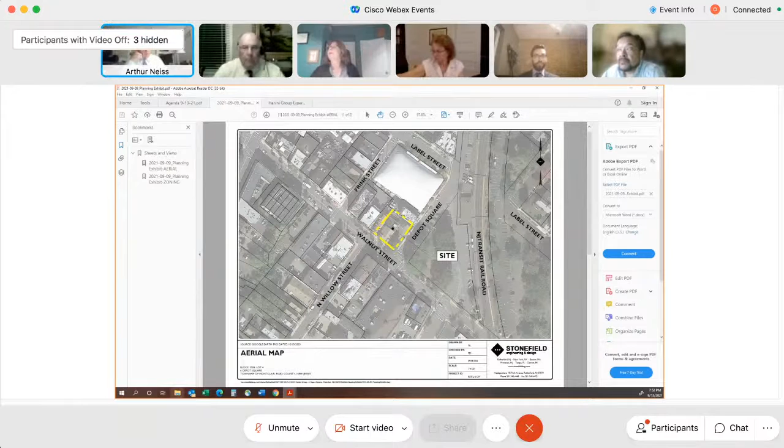Okay, before you begin, how many slides are there in the Hanini Group experience, if you know? It says 12 here.

Okay, Alan, if you want to proceed. Sure. Good evening, Mr. Chairman, members of the board. My name is Alan Trembulak. I am proud to be appearing this evening to present this application on behalf of my client, 6 Depot Square LLC.

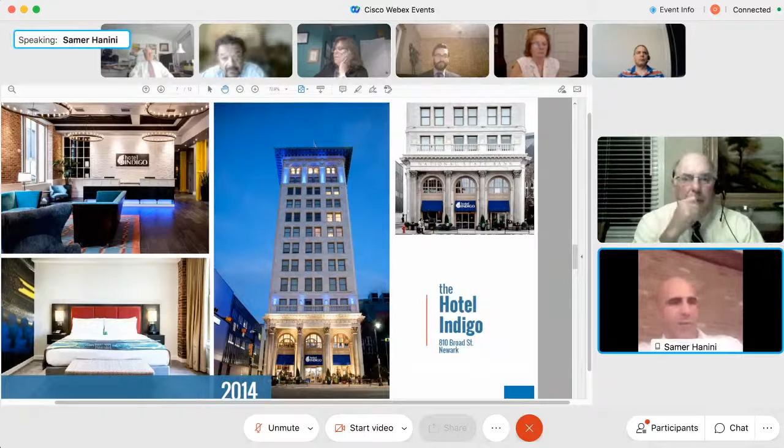This is the Hotel Indigo, another really exciting project. This was the old National Bank building, sat vacant for about 20 years. We converted it into the hotel, and again this won an award for engineering and restoration. On this particular project we did an extensive training program with a vocational school—we took 30 kids from vocational school and put them through training at Essex County College for hospitality. This was really interesting because we were able to bring the social aspect in with the restoration.

That covers our portfolio. I welcome you guys to visit our website and our LinkedIn page—we constantly update our sites with new information and things like that.

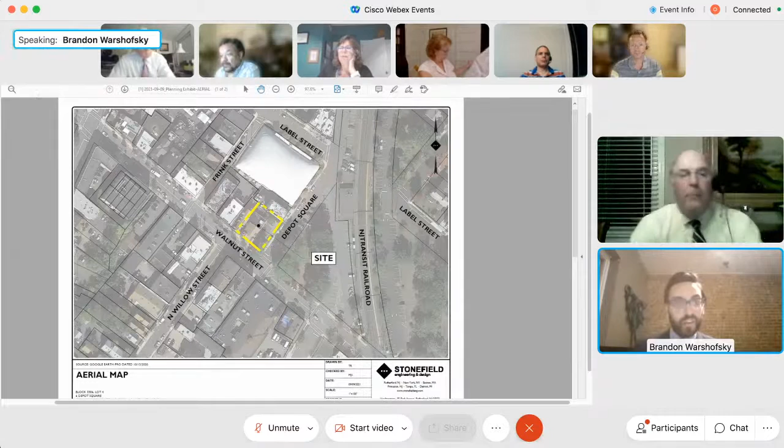When were you first licensed as an architect in New Jersey? I first received my license in New Jersey in 2017. You've been practicing architecture ever since? Yes, I have. And your license is in good standing today? Yes, it is. And as you indicated, you've testified before other planning boards and boards of adjustment in New Jersey? That is correct. And in all those prior applications, have you been accepted as an expert in the field of architecture? Yes, I have been.

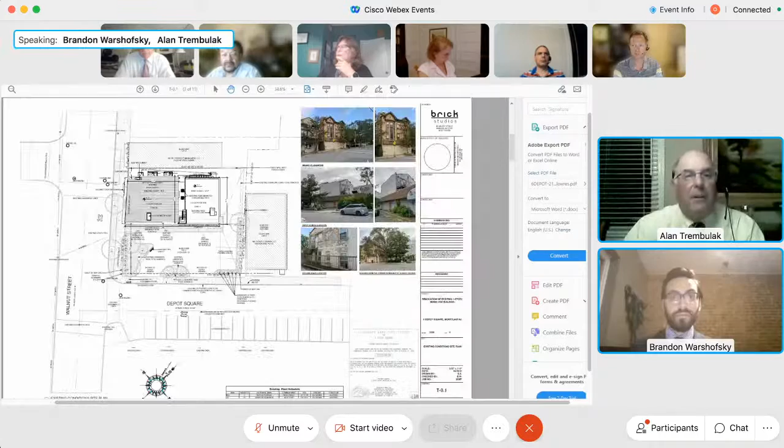Mr. Chair, I'd offer Mr. Warshofsky as an expert architect. We'll accept him. Thank you.

Mr. Brandon, you prepared the site plan drawings submitted with this application, is that correct? Yes, I did. And did you also attend the meeting of the Development Review Committee when the site plan drawings were reviewed by that committee? Yes, I did. And you also attended the meeting or meetings of the Historic Preservation Commission when the plans were reviewed? Yes, I did. And as a result of the various reviews preceding tonight's meeting, did you subsequently prepare and submit revised plans to address the comments and concerns, particularly of the Development Review Committee? Yes, and those revised drawings are what are in front of us now. And those have a revision date of August 9th, 2021, is that correct? That is correct.

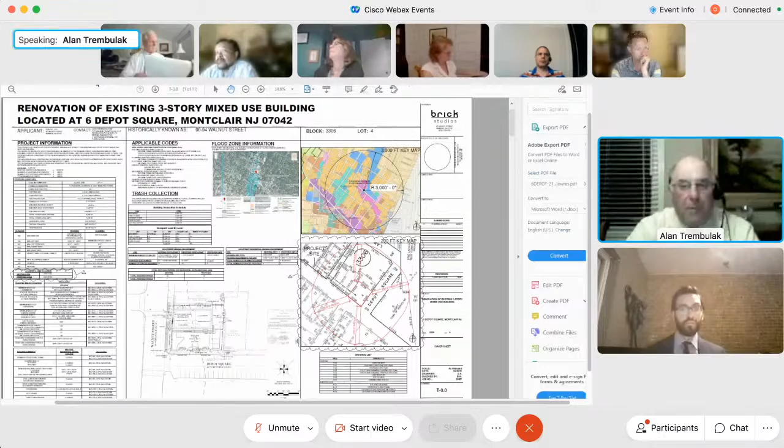So as you indicated, the plans are on the screen, and I'd like you to review the plans with the board, starting with the discussion of the existing conditions on the property, or starting wherever you feel like. Absolutely, I think that's a great spot, starting with the existing conditions.

So we have an existing building, as already discussed. It is an existing 3-story building. It fronts on Walnut Street and on Depot Square, with a small parking roundabout in the front of the building on the Depot Square side. The ground floor existing is a former Trumpets Jazz Club space that occupied the entire first floor, and the basement level was part of their service storage area. On the upper floors, the second and third floor, each existing contained 1 apartment unit.

We are proposing creating 2 apartment units on each of the existing second and third floors, and we are not proposing any volumetric additions to the building. So the building is existing, and the work to the building will be limited to interior fit out and exterior modifications to the facade as required based on the condition, and based on some of the considerations of the Historic Review Committee, and on other good practices such as good waterproofing and floodproofing practices.

We are proposing to restore the Walnut Street storefront to a similar state as it historically was observed, which we present. I don't know, Janice, if you want to flip around, I think on the 7th sheet we have that. There you go. Historic elevation, as well as some existing photos on the sheet that we're looking at here.

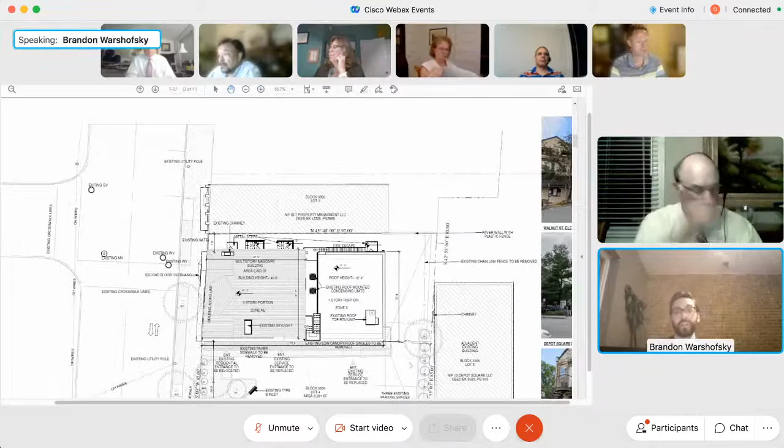And looking here, we can see that first floor where the Walnut Street facade has been completely covered over as part of the renovation to create the Jazz Club, which occurred, I believe, in early 1990.

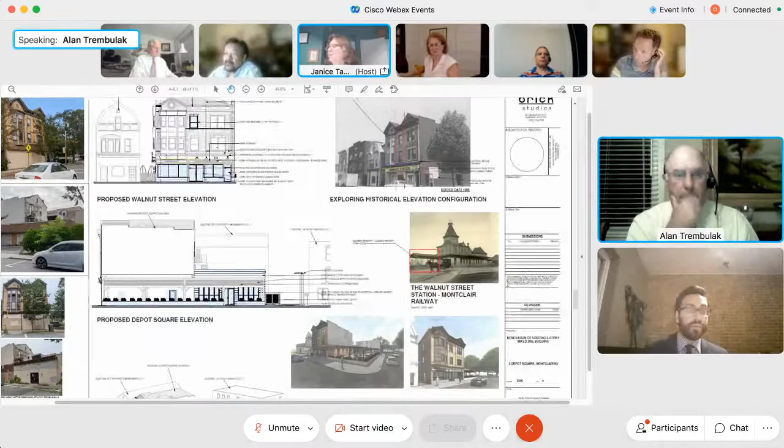And then on, sorry to jump around, the seventh sheet we show a historic elevation. I think that's sheet A-0.1. Sheet 7 though, right? I think you just passed it. I did, I went too far. Sheet 8, maybe, I'm sorry. Is this it? Yes.

And so we took our inspiration from the historic documentation as part of the historic survey that was done in the 80s in Montclair, as well as some design inspiration from some of the older details, such as the details observed at the Walnut Street station across the way, trying to draw some inspiration from the ironwork details that we see there at the train station.

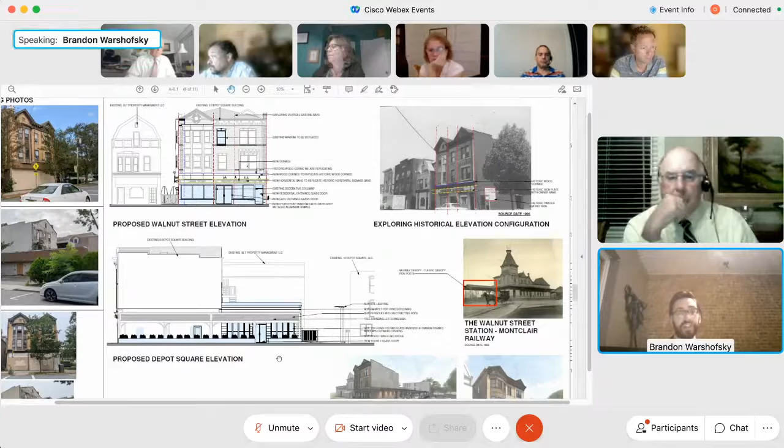So as far as the site plan goes, the proposal is introducing a new retractable pergola area in the area, which is currently a turnaround driveway. That will be a four-season outdoor dining space exclusively for the use of the restaurant or the rear first floor tenant. The canopy is retractable and would allow for natural light and air, for activation during the daytime as well as at nighttime, and it can extend for weather protection in rain and other weather.

The entrance to the restaurant space and the outdoor dining space is from the Depot Square side of the frontage. And the entrance for the cafe space is exclusively through the front facade, the building portion on Walnut Street.

We're proposing new building lighting to illuminate the area of the pergola, as well as some low pole-mounted lights in the service area to illuminate the trash enclosure, the driveway area, at proper levels that are required, as well as a very specific cutoff pattern to eliminate any kind of glare on the adjoining properties.

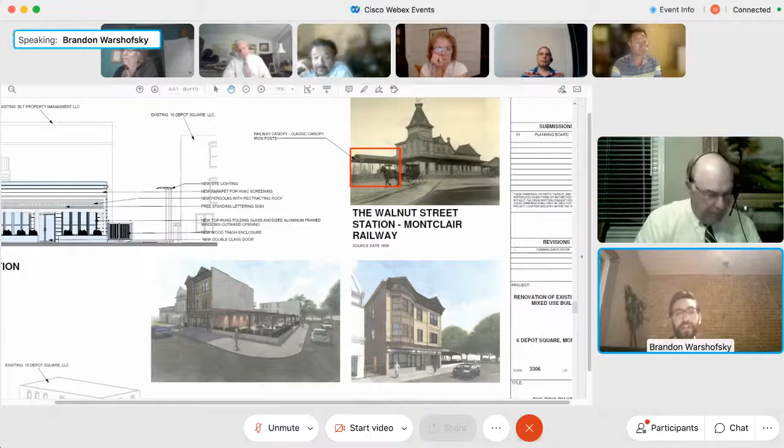We're proposing a small knee wall with plantings that are going around the perimeter to separate the seating area from the sidewalk, but all of the occupancy exists within the boundaries of the property. There would be no sidewalk cafe occupancy proposed.

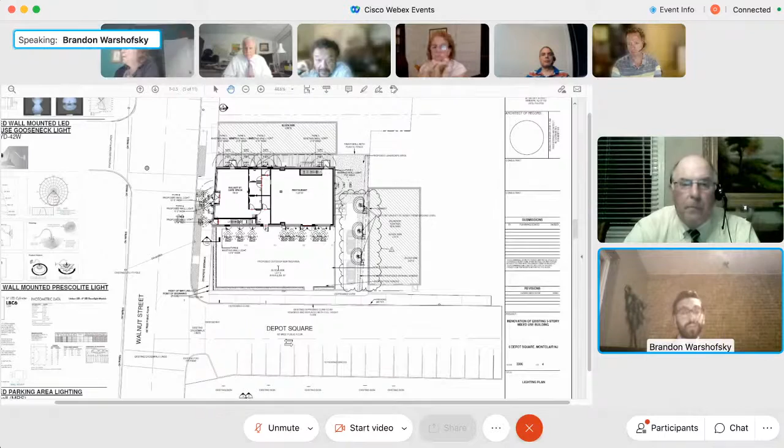Going back to the site plan, we reevaluated based on the board engineer's comments the amount of impervious surface we were introducing by taking away the existing green area. We're now attempting to replace that with new landscaped area around the parking and around the rear of the building. Anything shown in green there is proposed landscape area, which keeps our total impervious surface at almost the same number as existing today.

Mr. Warshofsky, I have a question about this page. The new raised access flooring, I think, is what you mean there. Yes, I'll chalk that up to a drafting error. The previous design had this on a pedestal system to create a seating area, so that raised access flooring is now replaced with landscape area.

So when you say landscape area, it's going to be a grass area? Grass area. Okay. And then we're introducing screening elements, those plants around the corner, here and over here. And then those in the front next to the cars are existing mature plants that we're going to keep as that screening element from the neighbor.

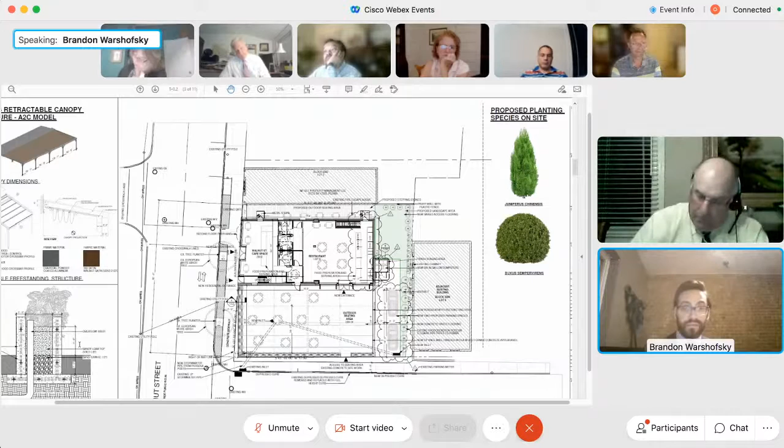And that's going to be planted with boxwood? We'll put little boxwoods in there. Okay.

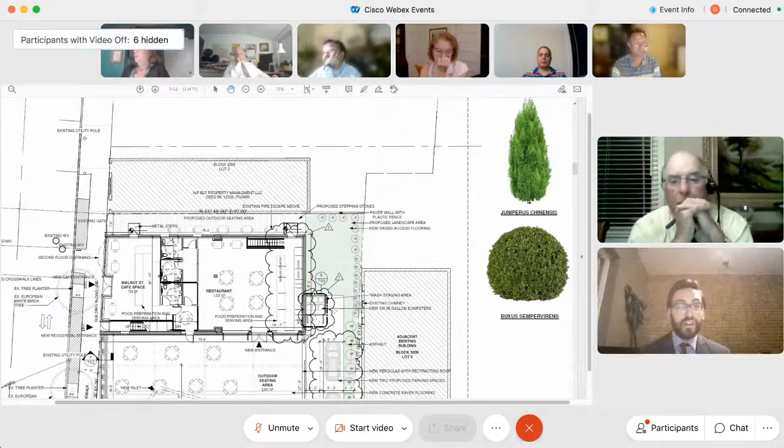While we're looking at the site plan, I was going to ask you to discuss the trash enclosure and what's proposed and where. Absolutely. We also revised the trash enclosure, both the location and construction, to be more respectful of the neighbor's building. We pulled it away from the property line and closer up against the subject building, and we've revised the details.

So one of the waivers we're seeking — we would be happy to comply with the requirements for the wood fence enclosure with a small roof over the trash enclosure. So are you basically saying the trash enclosure will comply with the requirements of the Montclair ordinance, so that no waiver would be requested or required? That would be our intent.

Okay, thank you. I do have a question about that trash enclosure — it still strikes me that it's right next to the neighbor's building and there are lots of windows on that side. Why don't you push it back away from the windows of your neighbor's apartment building? It's going to be smelly garbage from commercial restaurant waste. We're trying to minimize the impact of impervious surface by minimizing the driveway as well as creating new screening elements. Those smaller circles up against the property line are the new junipers we'd be planting as a screening element, as well as complying with the ordinance for construction of the enclosure. It should provide satisfactory screening and separation from the neighbor's building.

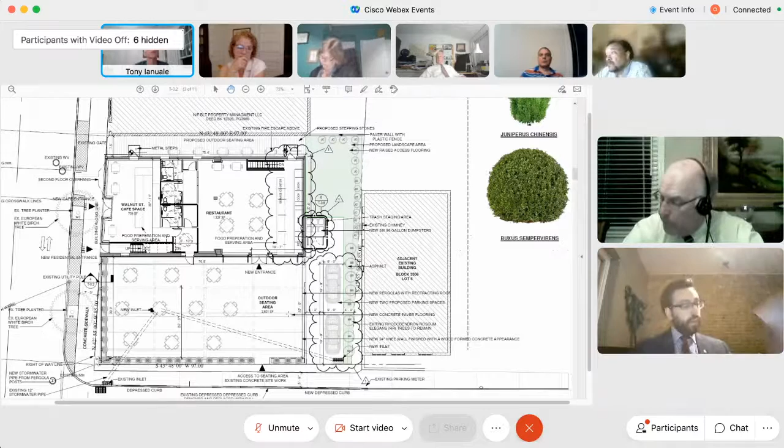Okay, here's an architecture question. How does that thing roll up? Can you explain how this retractable roof works and what it would look like when it's up or down? Absolutely, I believe there would be a detail of it on this same sheet. If you can go to the top left portion of this sheet - so it is a rigid frame. What sheet is that in our packet? Can you tell me the drawing number? E0.2, the third sheet. Thanks.

So it's a rigid frame that remains fixed, and the canopy fabric itself is on parallel bars that run along these rigid frame tracks. So the whole thing will retract back to the high point, and the fabric drapes between those bars as it retracts.

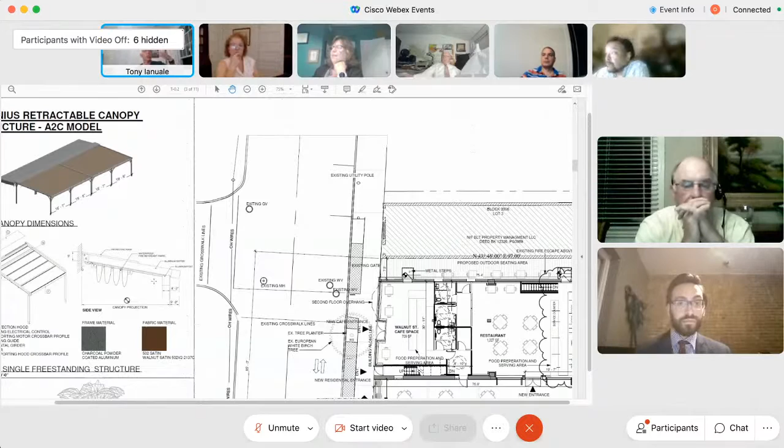Awesome, thanks a lot. And since there's no civil, there's a new inlet - are you going to retain any of that water on site, or is that just going to be piped out off site? There is an existing connection, so we are planning on attaching to that existing storm connection for our management, and actually reusing some of the catch basins that are there on site.

Okay, and then do you have a net zero add of impervious? I'm not sure if you might have said that, I apologize if you did. We have a net loss of about 50 square feet. 50, okay. All right, thanks.

I have a question - what is the capacity of the outdoor area that has the overhang where those round tables are? Of the outdoor area specifically, I don't know if I have that broken up. We're calling it out as a 58 seat total capacity for the restaurant. That would be indoors and outdoors? Indoors and outdoors. Say about 20 for the indoors based on the table counts, or 38 outdoor - I think it's 40 outdoor actually, and 18 indoor.

Okay, and this retractable roof can withstand like a foot of snow? What happens when it snows? It would not be designed to withstand a foot of snow. It would be drawn back in the retracted position to allow the snow to fall onto the patio.

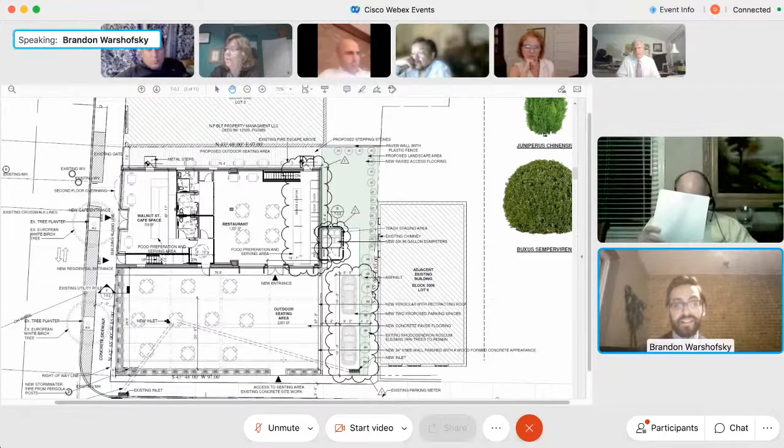So clearly this application is for 60 seats and no more than 60 seats, because if you have more than 60 seats, then you have a parking variance. So I think it's important that we have an accurate count for the number of seats for the restaurant and the cafe.

Well Janice, don't we have 40 seats out in the outdoor space and 20 seats in the restaurant space, even though one of those tables seems very close to the stairwell? That's your 60 seats right there, but aren't there an additional 6 seats in the cafe space? You have 6 seats in the cafe space and then all these other seats back here for the cafe, so I think we call that out as 16 seats for the cafe.

If I can jump in here, Janice, your memo correctly points out that the cafe will have a total of 20 seats and the restaurant will have a total of 58, as shown on these plans, which would make for a total of 78 seats for the entirety of the first floor, including the outdoor areas. And that's what we're seeking approval for.

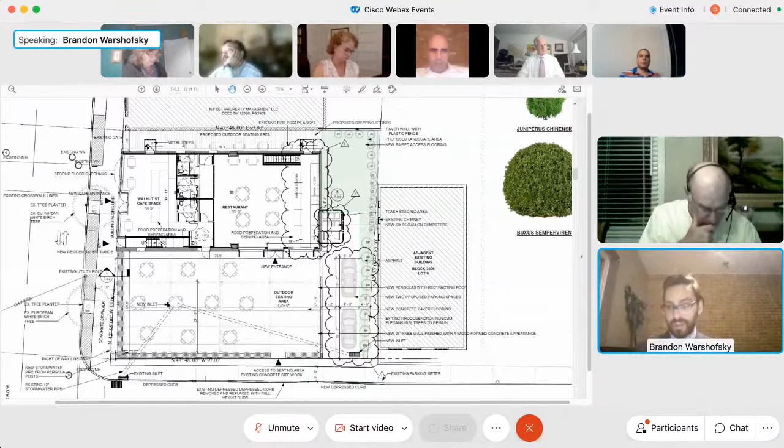I would defer that response to our traffic engineer when he begins, but I would confirm, at least based on my drawing, we are calling for 6 required, as Alan said, 1.5 per unit per RSIS, for a 2-bed unit times 4 units is 6 required. But I will defer to my expert to address that fully. Yeah, your expert refers to 2 parking spaces per 2-bedroom unit and references the RSIS. Yep.

So I'd like to get clear exactly how many seats you have indoors, outdoors, and with respect to the cafe and with respect to the apartments, because it's not clear in my mind exactly where each of the parking needs come from.

I would confirm what Ms. Talley has in her report for the variance, stating that it would require 33 parking spaces. Total demand for the site is 33: 20 spaces for the restaurant, 7 spaces for the cafe, and 6 spaces for the apartments. So the potential is that there's 2 missing there if your parking guy is correct.

And yes, that's per Ms. Talley's report. I might have been relying on what was in your plan. Of course, I'll take another look at that.

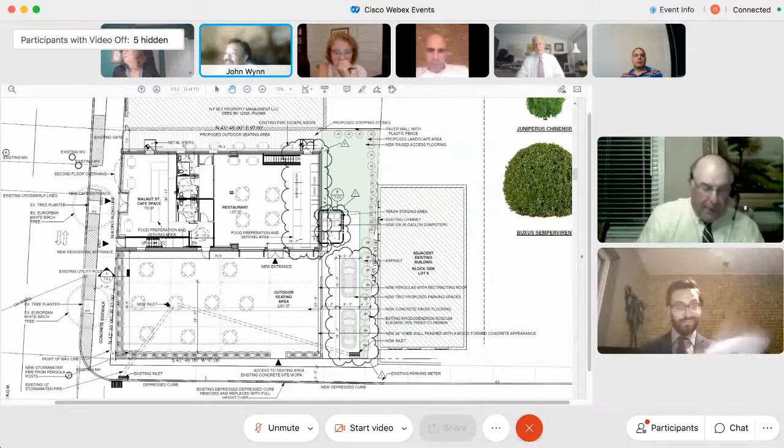Okay. Mr. Trembulak, were you finished with your questions for the witness? I know we believe we interrupted you. Yeah, thank you, Mr. Chairman. I think there are one or two more things I'd like Mr. Warshofsky to discuss. First would be the signage that's proposed for the building, including the one sign that requires a variance.

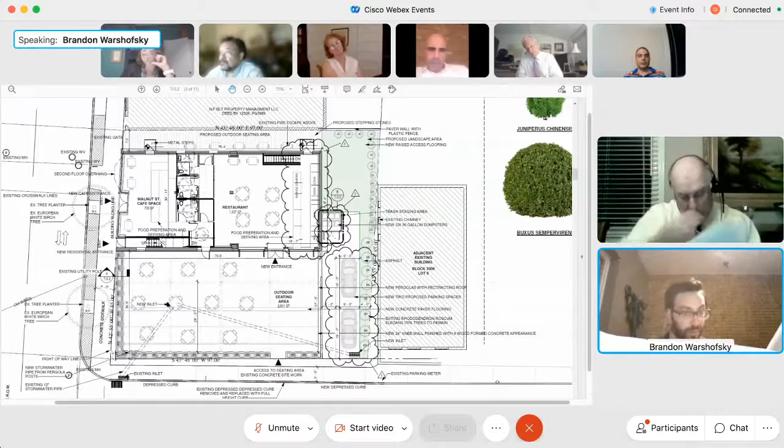Can you discuss those details? Yes, we are requesting a variance for the signage on the Depot Square side in order to properly provide wayfinding and a location into the restaurant space through the outdoor seating area. So Janice, if you wouldn't mind, go back to that sheet number 8, A0.1, that has the renderings in that axonometric.

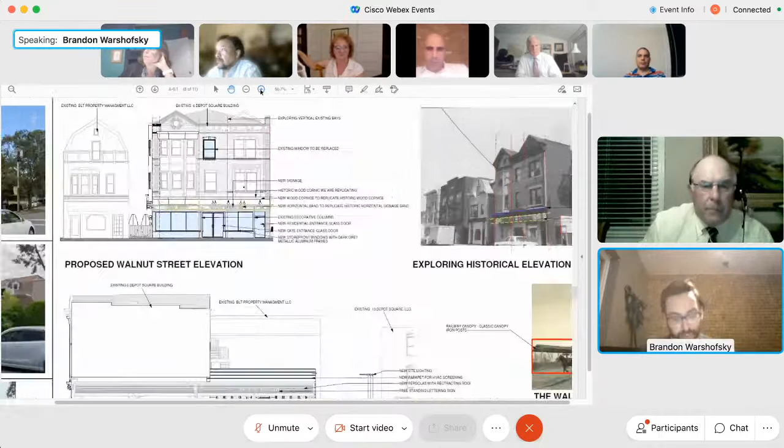So we're proposing some freestanding lettered signs on the edge of the pergola on the Depot Square side, which is exactly right there. That would be illuminated letters that are illuminated from below, not internally illuminated. Freestanding, about 11-inch tall letters with the name of the restaurant.

And those would be, which is not allowed by your ordinance, standing on top of the beam, the low side of the pergola. So that's the sign that requires the variance. We feel that that's a stronger approach than placing the signage on the building, as it's a little more set away from the actual ingress point.

Will the building have a name? The building itself is not intended to have a name. The restaurant would have a name. Just the restaurant, okay. So there's a sign proposed, correct me if I'm wrong Brandon, there's a sign proposed for the restaurant, which would be located on the pergola.

And is there also signage proposed for the cafe on the building? Yes, that's correct. We're proposing a signage band that is also externally illuminated by gooseneck lamps that matches what we were able to observe from that historic image on the right side, the historic sign band location and its relationship to the facade.

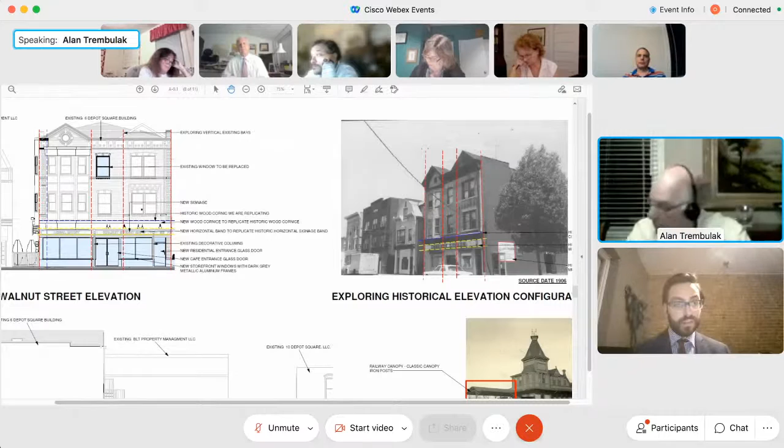Absolutely. So based on the layout of the basement and the access and requirements of trying to fit a whole bunch of things down there, we were able to fit some amount of storage, but an insufficient amount to meet the 200 square foot per unit requirement.

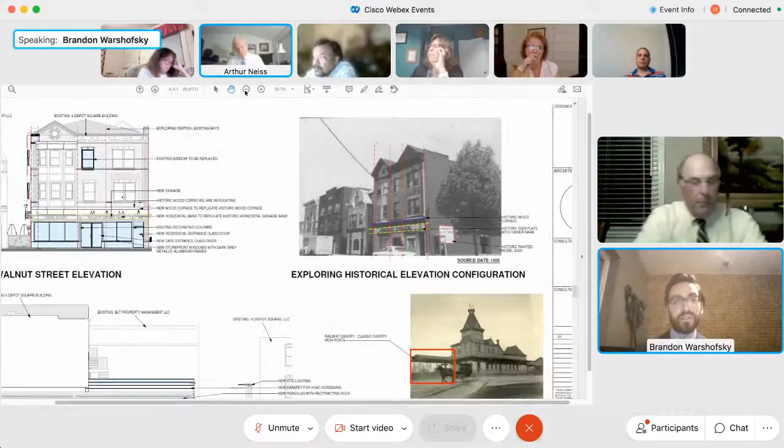But we've also done our best to try to create sufficient storage, or ample storage, within the units, with the addition of a couple of extra closets and the overall size of those spaces. We were attempting to create as many locations to store things as possible without compromising the layout or the function of any of the spaces, or the ability of them to exist beside each other.

So we added some additional closets in addition to bedroom closets and washer dryer closets. We added another entryway closet that would be used for storage within the units, as well as that basement storage on the right side, which is divided up into 2 different storage rooms that will be exclusively for the use of the tenants.

So do you believe that the closets and other storage space provided within the apartments is adequate for these apartments given the size of them? I believe this would be adequate, yes. Okay. Thank you.

Can you tell me the size of the apartments? Did I read this correctly? Each of them is about 559 square feet?

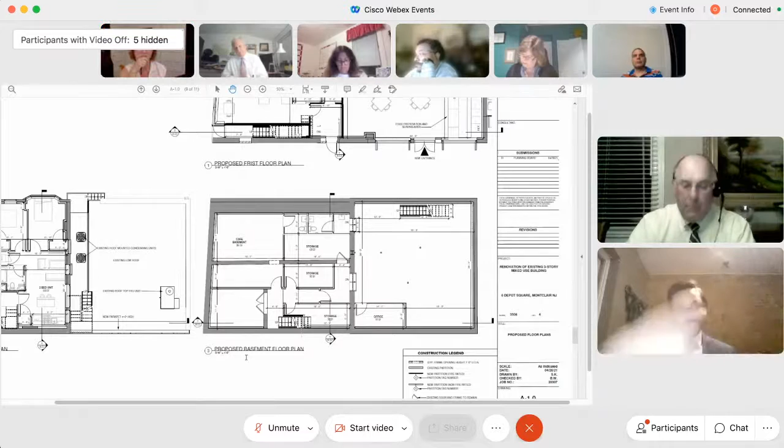That seems very small for 2 bedrooms. 559 square feet is what it is called out as. So each of those are 559 square feet, and they're 2 bedrooms, with each bedroom being about 10 by 10 square feet.

Correct, as it's shown there. It strikes me as very small little spaces. But anyway, I had another question.

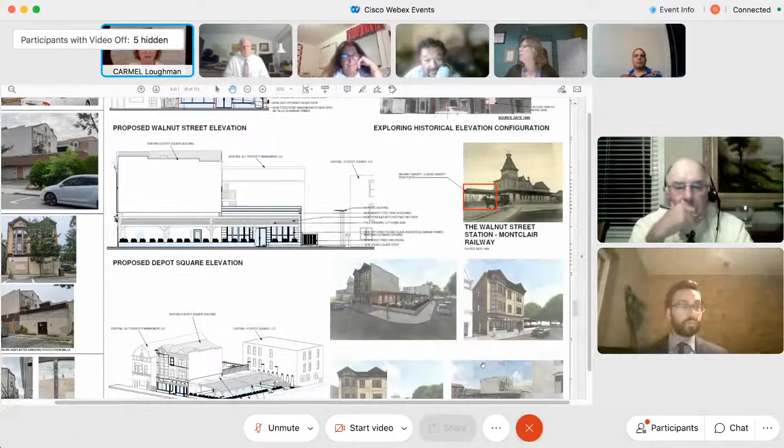You were on exhibit A0.1 about that alley. You intend to put seating in that alley? Yes. If you look at the picture - up on the lower left, you can see that little alley. There's a fire escape that comes to the other building, and there's the kitchen fan, and there's steps that walk up, that come down from the building as I can see it.

Does that fire escape need to be lowered if there were an emergency? And would any of your chairs and tables interfere with the use of that fire escape?

So we are proposing some modifications. Yes, you noted some things about stairs and exhausts. We are cleaning up that side of the building. We're closing up a couple of those openings because they are unnecessary for the proposed layout. And we would as well be sure that the clear space for any required fire escape movements would be maintained as part of the layout of that space.

Is this something our fire department would look at to make sure that fire escape would work correctly, given your proposed adjustments? Do we typically have our fire guy look at this? Well, first, I sent it to the fire department and the fire code official, but he didn't send any comments as part of site plan review. The fire subcode official does review the plans when they come for a building permit, so if they're not caught at site plan level, they'll be caught at building permit.

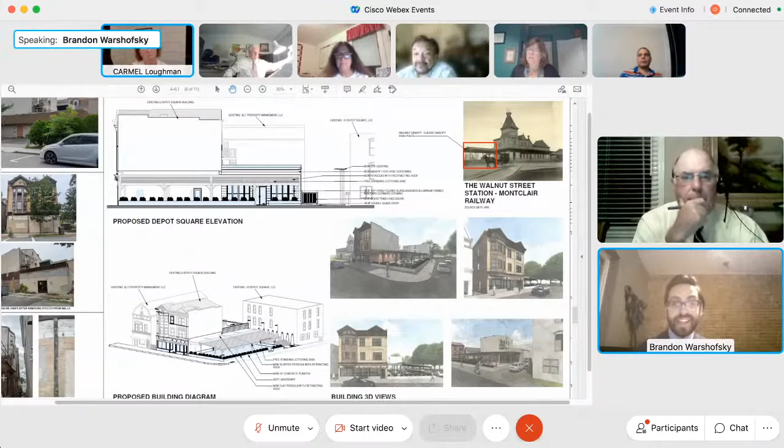But absolutely, we love it. I would feel happier to create a unique space like this. What? I'm sorry, I said absolutely - we do love a good design challenge to create a unique space like this. A little bit more than that.

I think we need to have our fire people comment on that specific fire escape. I'm concerned about it. Of course, health, safety, and welfare is always number one. I'm a risk manager by training.

Mr. Warshofsky, would this be appropriate for you, a question about the HVAC system, like where the units would go for air conditioning? Absolutely - heat for the apartments and the restaurant.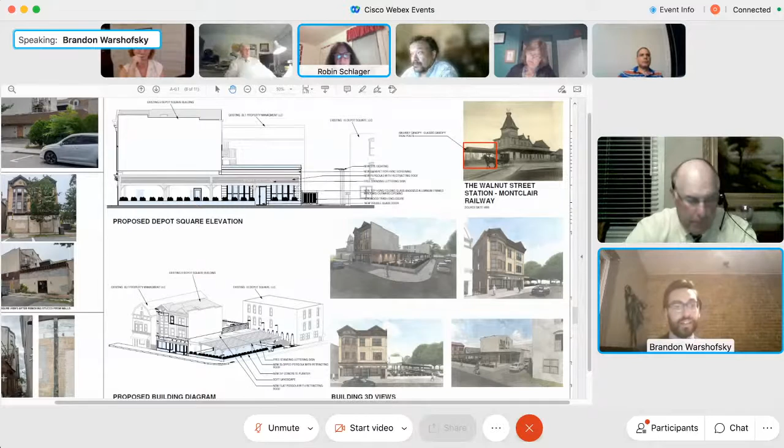Do you have a sheet that shows that detail? If you go back to the A0.1. Is it a flat roof? The lower portion is a flat roof.

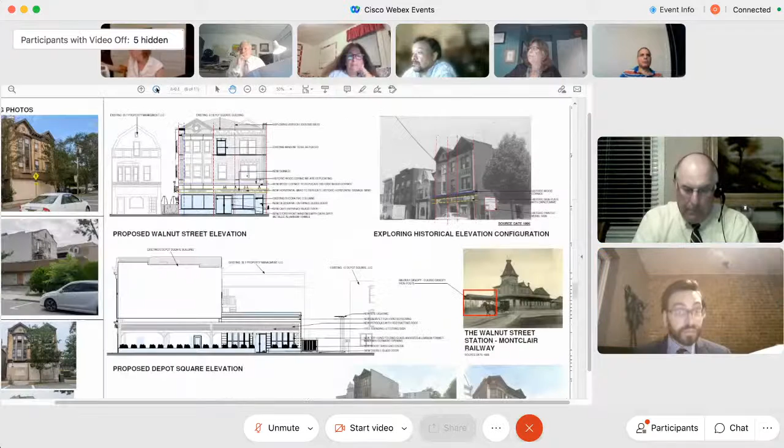On A0.1, we're calling out a new parapet for HVAC screening, and that's kind of in the background beyond the sign we were just looking at. How come I don't see that parapet? That little stripe in blue.

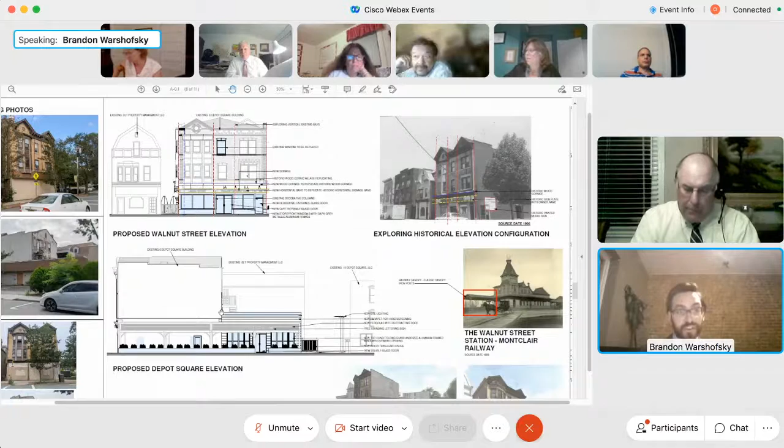Here? Yes, so we would be extending that up since we're removing that little roof structure that was there, to maintain the parapet wall and extend it up to provide better screening for that equipment. Is that where the equipment is right now? Yes, correct. So you'll be adding the additional equipment at that location? We're evaluating how reusable that big unit is, but any of the new equipment, yes, would likely be on that flat roof area.

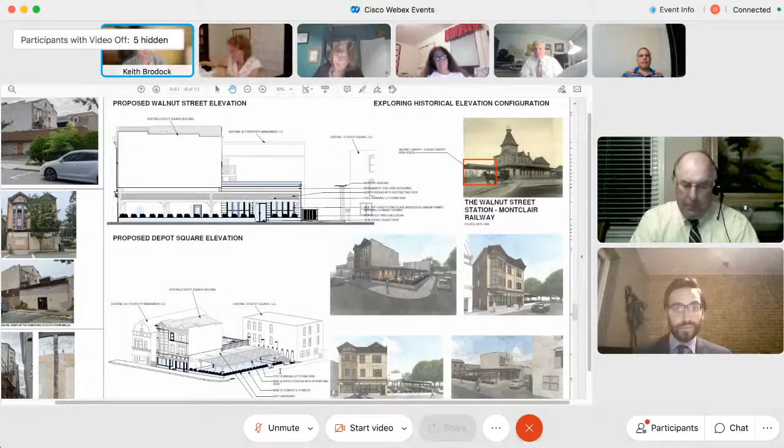And how do you shield that equipment from noise, for instance, for the adjacent building and also for your tenants on the second and third floor?

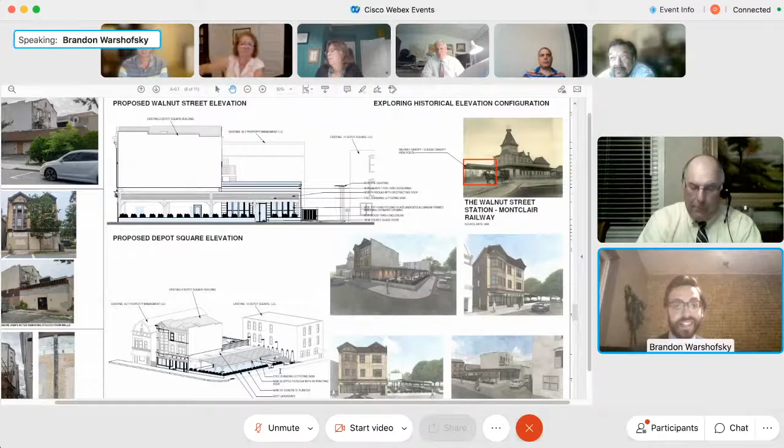To some extent, the parapet screen kind of keeps the noise from going horizontal. It channels it a little more upward. And then for the building itself, a lot of that's up to the windows. Unfortunately, that's kind of the condition as the way this building is configured, that there are windows that overlook that low roof.

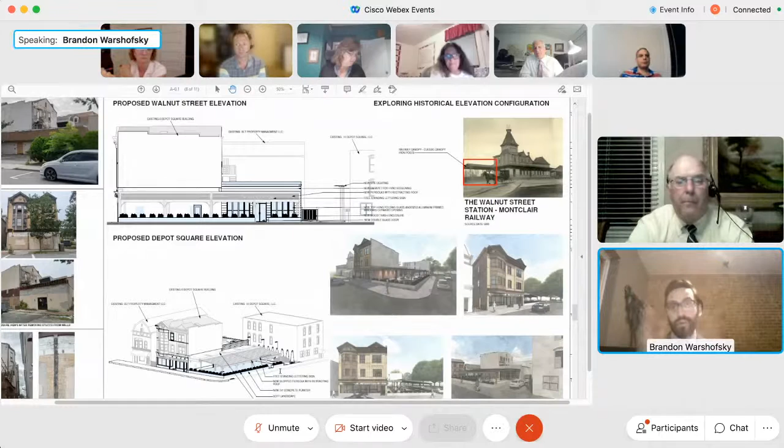Also for the building to the right of it, you have noisy, now you're having 4 apartments, 2 restaurants. How are you protecting the people in the 6-family home right next to you from the noise those units will make? Sure, so ideally this parapet screening, increasing the height slightly of it, funnels that noise so instead of radiating out horizontally, some of it goes a little bit more up and lessens the travel of the sound. So your 3rd floor apartment will get all the noise.

Well, that extended parapet's really only on the Depot Square side, right? I guess the question is, is there additional screening that you can put that will protect all the surrounding apartments up and to the side, to protect it from the noise that potentially four, 5, 6 units would be making?

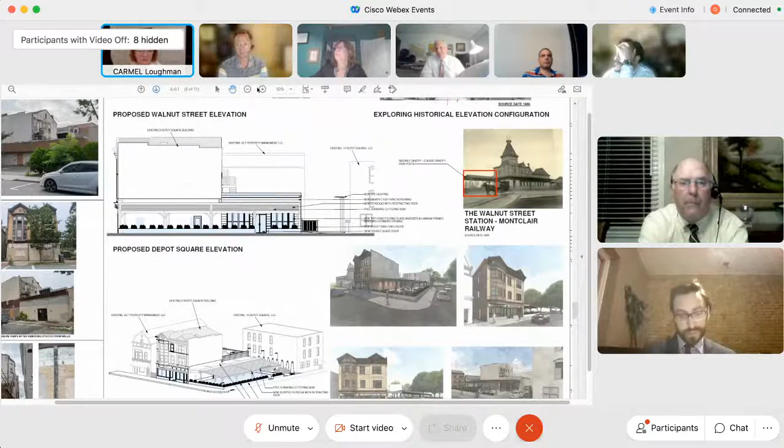Do you guys have a noise ordinance or a decibel level that we would want to be considerate of? I don't think Montclair has anything beyond the state requirements for noise levels at property boundary lines, and I believe it's 60 decibels. 60 or 65, Janice, yeah. I think most of the equipment we would be specifying meets that sound threshold at the equipment.

Well, I guess we're looking for something extra, given that you have an apartment building right there with many tenants. Do you have any kind of, is there a difference in the quality of screening that you could use? Well, the specification of some of the equipment will be sensitive to the fact that there is such an adjacency. We won't get the jet engine version. We'll make sure it's something that has, a lot of these units have night mode and things where they're kind of running, but they purr a little quieter to be a little respectful of the neighbors.

And do they have a night mode or similar condition for a typical kitchen exhaust too that would be located on that roof? The kitchen exhaust, we would have to look a little more specifically at the equipment. But something like an exhaust upblast fan, kind of the same concept, it's discharging up, so the sound doesn't really travel horizontally by the nature of the device.

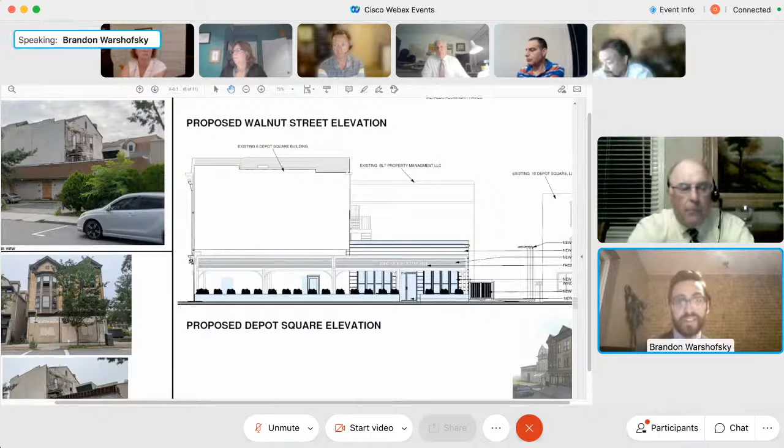As far as you know? I mean, I guess maybe no. Without an operator for the cafe, it would be within the hours that are set by the township, hours that are allowed to be doing business. But I couldn't testify to specific hours when that would be. And the restaurant also could be going all day? The restaurant could also be going all day, absolutely.

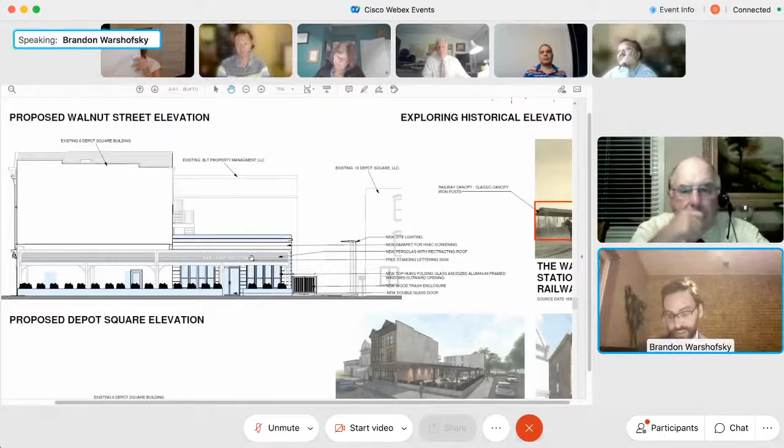For the lighting on the new proposed sign on the Depot Square side, where does that lighting attach and where does it originate from? Sure, there's a detail on A-2.1, it's the second to last sheet, so sheet 10. And that light is kind of an LED strip down the length of it that's housed underneath, and the letters themselves are positioned on top of that to receive the illumination from below.

And how bright is a light like that? Bright enough to illuminate the letters, but sensitive to upward light pollution, and not creating excessive brightness. Is that something that'll shine into windows if there are any on the building behind it, BLT? I think with what we were looking at for one of these, they have like a diffuser, a lens or something that makes it so there's no intense direct glare at any angle from the fixture. That was definitely a consideration for us.

Could they be put on timers?

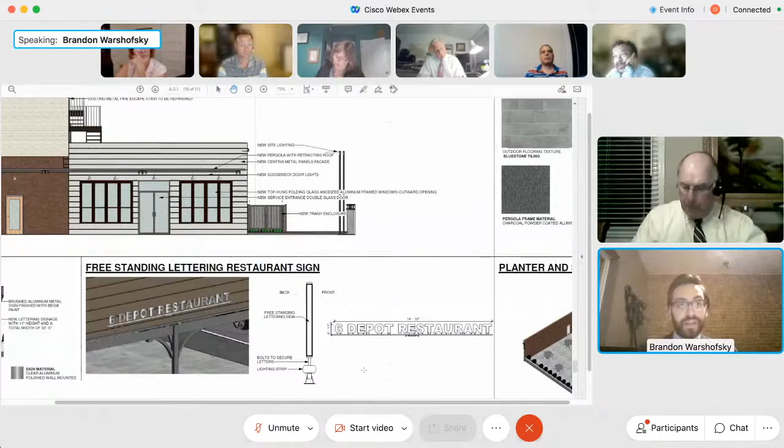Absolutely, it would operate when the restaurant is open and should be shut off afterwards. There's no reason to use the energy to run it all night.

And does that sign move with the retractable roof? It's a little hard to tell, so it's not attached to the roof structure, it's on that movable part, it moves behind it. It's really hard to tell how it's attached, but I'd figure it to be, if it's a post and beam pergola system, that it's kind of sitting on that beam, on the edge of the pergola, not really set back. I think it slid over a little bit in that rendering.

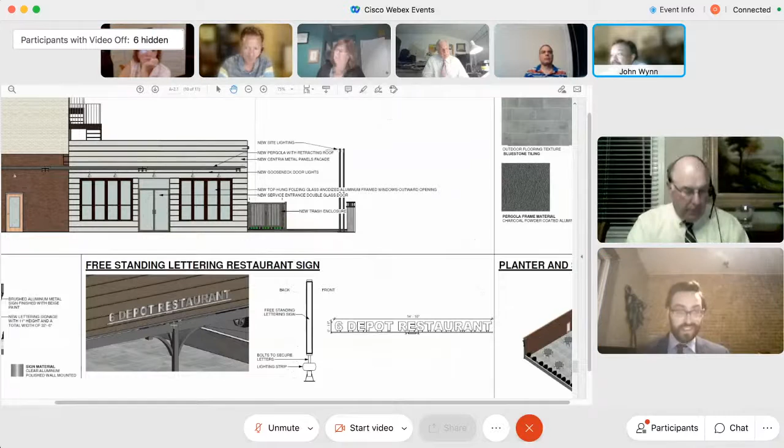Let me ask you another question about your renderings. If you go directly below that and look at the top of the existing roof where you've got the peak in the front, on the Walnut Street side, it's actually showing a peak, and you have it white filled in at the top. It's on the left-hand side of the building, opposite from where you were, Janice. Then if you go up to the very top of that sheet, where you see the actual facade on Walnut Street.

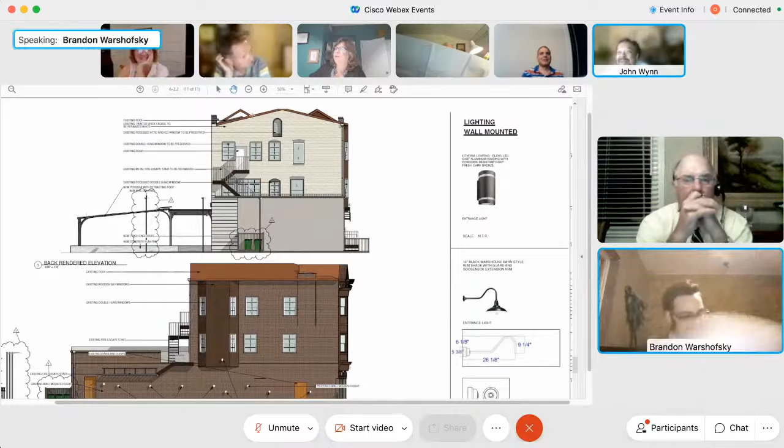I apologize for that, that looks like a drafting mistake, I must have lost something there. I was like, are you going, was this sort of like a beam element, or are you not going to deconstruct the roof there? Because the roof is shown on all the other places, I was just kind of thrown off. Absolutely, that's a good catch, that is not the case. The roof is to be maintained and repaired as required to maintain it.

Okay, so will the right-hand side look the same as the left-hand side? The right-hand side and the left-hand side would look the same, basically the same as it does now, which is not exactly a different detail.

Yes, so as long as we're talking about the front, if again, Janice, if you go up to the, keep going right there. If the building, I see you've got the gooseneck lights over where you have depicted Walnut Street Cafe, but over the local eatery, you've got the bump out for the windows for the apartments up above. Is there going to be any lighting under that bump out to shine down on whatever signage band is there? Or is that just going to be dark at night?

We are not calling for any lighting on that side, I think that's because of the bump out. So yes, we are calling that as dark for right now, but with the emphasis being more to the right half of the building for the entrance to the cafe and the residential entrance, it's somewhat of an attempt to balance the facade between the bay element and the right half of the building.

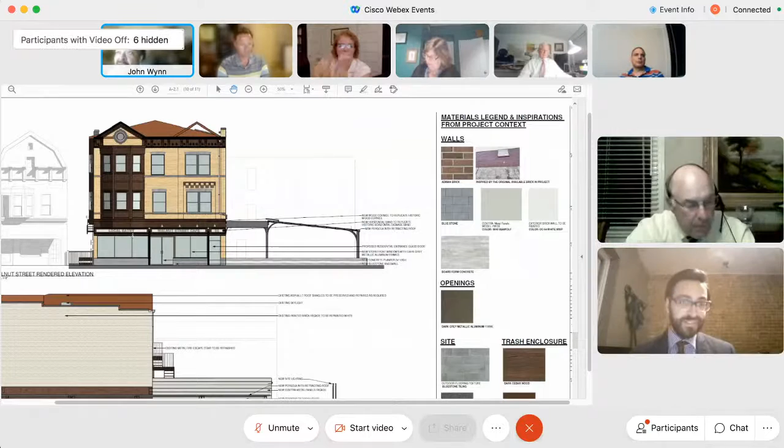Sure, but if you wanted to do something like that, I think that would be something we could consider certainly, but if you want to do it later it might be an issue. Right, I think then we would say yes, that's a good consideration, and a wall washer or some sort that does not provide excessive illumination in excess of 0.5 foot candle at the property line would be an intent for that side as some kind of concealed installation under the bay.

With a general approach to the illuminance similar to the, let's call it, the type B proposed wall lights as shown on T0.5, basically matching the plan illuminance level of those goosenecks with a wall wash to accomplish the same.

Exactly, to balance the... We also were big fans of symmetry, so this one I was scratching my head, sharpening my pencil for a bit with this building.

No, I see. It's a challenge. It's a challenge, but what you're doing is interesting.

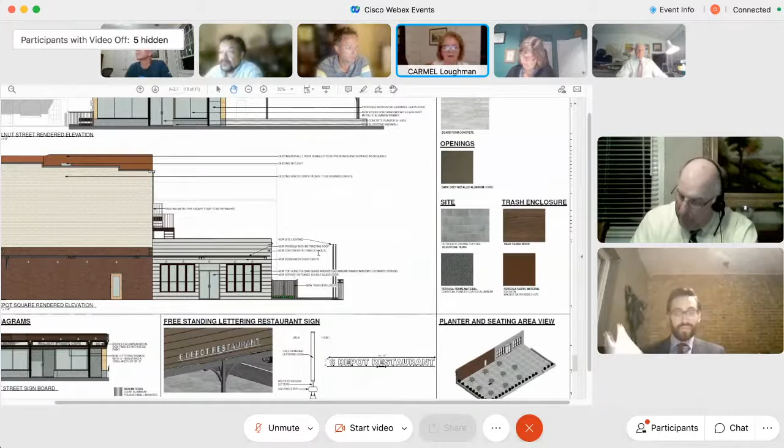Are there further questions from the board? Yeah, I have another one. I just want to make sure about the lighting by the parking lot, or the driveway there. It says there's I think 3 15-foot poles planned for that driveway or parking spot. So it strikes me, how are you really going to prevent a 15-foot light from shining into the second floor apartment next door?

Sure. I know you said there are down shades that make it point down. Do they really work, or can you just block it out with a shield to protect that side? Yes, that light is exactly that. It's a shield, a fully opaque enclosure around 3 sides of the light that keeps 100% of the light spread in the direction or cutoff pattern we're intending.

Because I imagine that light would be on since it's for your tenants' parking. That's the light that illuminates them getting out of their cars and walking around to the front to get into the building. Correct, so you might want to leave that on, not turn it off at night. Correct, unless it's on a motion detector. Right, like a street lamp would be.

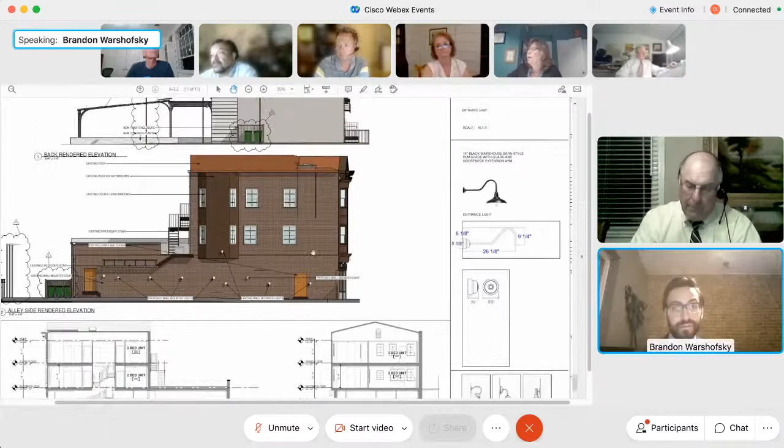I don't see a detail of this light fixture. On T0.5, bottom left side of the sheet. And I have in my notes, it may be from your ordinance, that the pole should be 12 foot instead of 15 foot. I don't know if that was from the planning report, but I believe we're modifying that accordingly. Right, because of the residents next door, I think a 12-foot light pole would be more appropriate than 15 feet at this location.

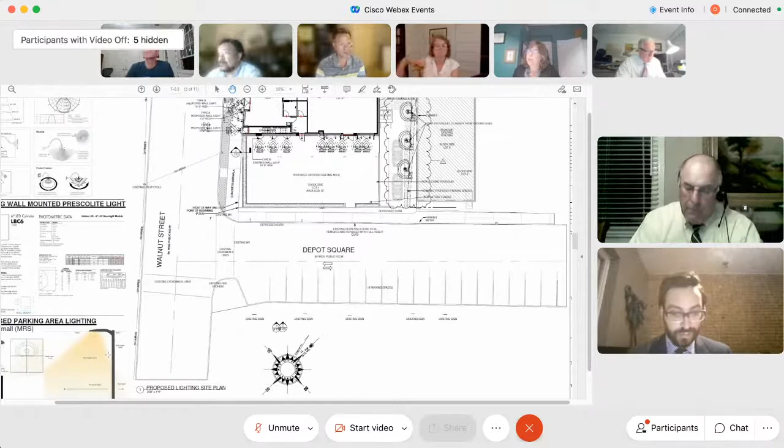Yeah, I would agree. We were also trying to be sensitive to the trash removal and clearances. And do those proposed fixtures provide enough light in that area? Based on our illuminance, I would say there's sufficient light without creating excessive light spill onto the adjacent property.

It looks like it's a very tight cutoff pattern. So what about these areas outside the isolux patterns? What's going to be the illumination where these cars are? There's some spill light beyond the isolux. Obviously it's not a hard line cutoff. That should give, between the fixtures based on their spacing, generally enough illuminance for the area of the car or getting out of the car.

Well, I guess this diagram shows that it does not. It shows that where the cars are, it's outside of the 0.5 foot candle. I don't know if reducing it to 12 feet brings it brighter at ground level, but our ordinance is really for where people are walking. It should be 0.5, and it doesn't show that it meets that requirement.

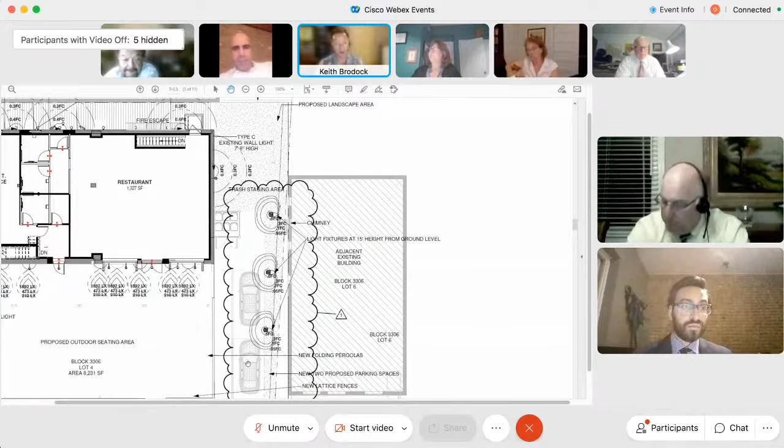Yeah, I was going to raise that too while we're on lighting. How is that outdoor seating area lit? And if I think of it as a walkway for someone entering the restaurant, how is that lit so people can safely traverse the area? Absolutely. The pergola does have an integral lighting system to provide that general illuminance. For clarity, we wanted to leave that off and show the building mounted light fixtures and their illuminance for that first bay of the pergola structure.

And those lights on the pergola, do they remain lit and in place even when the awnings are retracted? Yes, they're attached to the primary structural frame. Okay, also kind of like a recessed linear light.

Are they depicted on any drawing enclosed in your submission? Because they should be on these plans somewhere. They should be shown on the plan somewhere. The pergola lights? Yep.

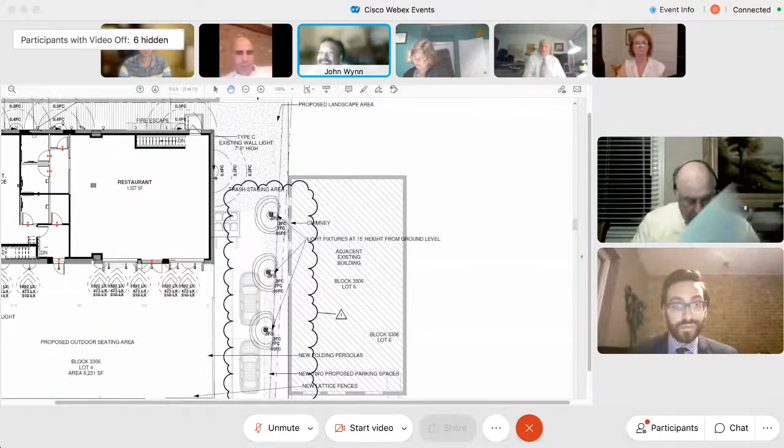They are not shown in too much detail because they're recessed, so the renderings show the lighting from them but don't show the fixture, since it wouldn't be visible inside the structure. I guess we just want to show the illumination pattern. Yeah, you'd have a couple of lines of explanation with an arrow drawn to where the light's coming from, to show that it is there. That's certainly something we can provide if needed.

I had one follow-up question, if I might, Mr. Chair. Brandon, I'm looking at the lighting plan, which notes the two sections of depressed curbing on the Depot Square side of the building. Your plans indicate that one section of depressed curbing would be removed and replaced with a full height curb, and I think Janice correctly pointed out in her memo that the other section of depressed curb should also be eliminated.

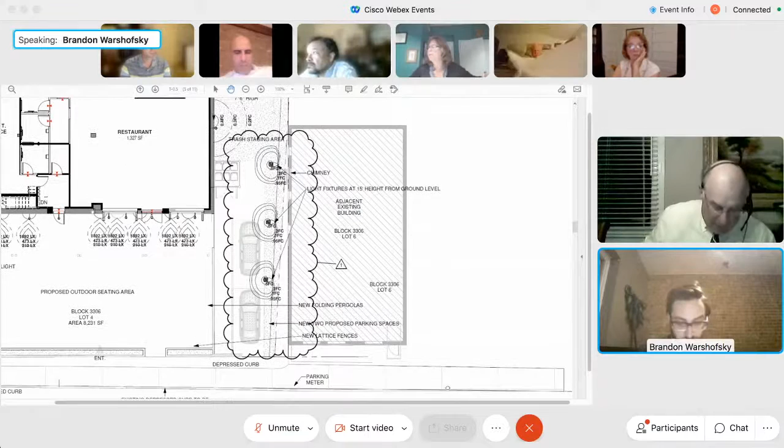Do you have any problem making that change, eliminating the other section of depressed curb on the plan left, closer to Walnut Street? We would have no issue with that, as we are eliminating that driveway. And that would allow for, I guess, at least 2 additional parking spaces on Depot Square as well. That I feel would be appropriate. Yep, okay.

Can I jump in with a question or two, Mr. Warshofsky? There's a gate in that alleyway area that fronts on Walnut Street. How do people get out of there? Is the entrance to that area through the metal steps shown on A-1.0?

Yes, from the cafe space, you'd be able to get into the alleyway through that gate, which would remain open during business hours, as a door would be required, or through the existing doorway from inside the cafe space down those couple of metal steps into the outdoor seating area.

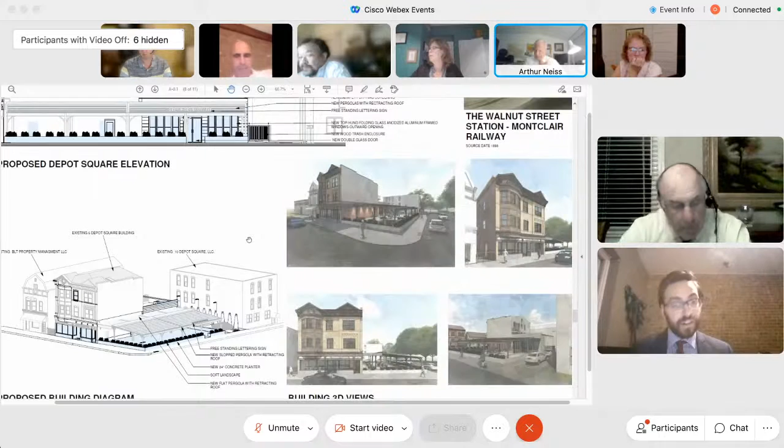And in the rear, there's another door. What is that? I'm on A-1.0. In the rear, from the restaurant space, it's just a secondary egress from the restaurant space. That would be more of an emergency use, if you're referring to the plan top right corner. That's correct, that's what I am referring to. That would be a secondary means of egress.

How many steps does it take to get from the cafe down to grade? In the rear, the plan right rear door, it's 18 inches down to grade. And in the front, the plan left door is 6 inches down to grade, which is 1 step. Okay.

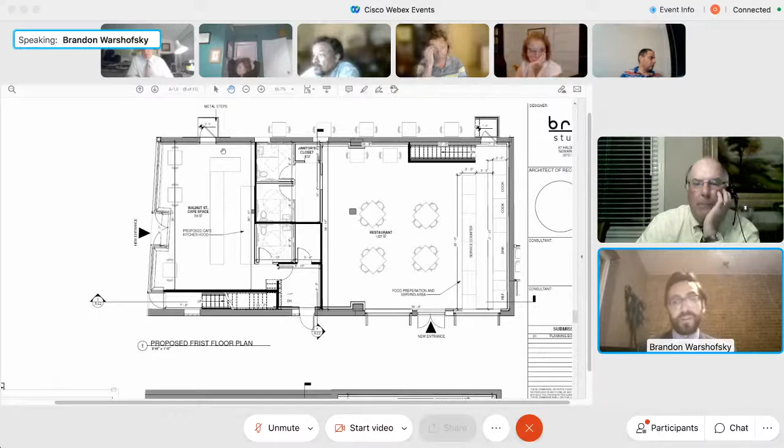You've discussed heating—I'm changing to a different part of the plan, the outdoor seating area. You've indicated, in connection with Ms. Laughlin's question and your own testimony, this is going to be a 4-season space. Where and how is the space heated? Those would be portable heaters or something provided as part of the equipment from the operator, not a built-in system, the same way one would heat a similar outdoor sidewalk cafe space. So electric heaters, basically, or propane heaters, but portable, self-contained.

Another part of the confusion I had is when we were discussing earlier about the coverings coming down from the pergola in order to enclose or protect patrons from the elements—that creates, I think you said, a building. That's correct. So I'm questioning how that is to be handled differently from a site plan perspective here in Montclair, or is that just the way it is? I need some clarity about that aspect of the testimony.

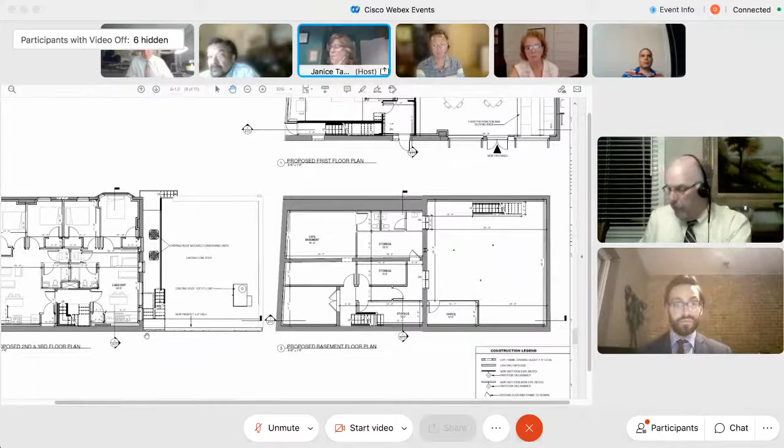Essentially, we're giving a site plan approval for a new building. At the same time, our site plan approval is reducing the amount of parking on site from 4 spaces to 2 spaces. This is my segue into my issue. We are increasing the number of dwelling units from 2 to 4. I double checked the RSIS—it is 8 spaces that are required under RSIS. So my concern is that, yes, this is approving a new site plan for a new building on the vacant portion of the site, with the cost being the loss of 2 of the existing parking spaces.

I believe we would be open to understanding any restrictions on limits of placing wall enclosures around this pergola structure, if that were a condition of this being considered as an outdoor area, and to not have the ability to be enclosed with a hard form type panel.

I guess my concern is not so much that. My concern is the creation of 2 apartments without providing any on-site parking for those 2 apartments. It's always nice to have at least 1 parking space per apartment. Having been a renter in Montclair without on-site parking, it's extremely inconvenient when it doesn't have it. I know there's commuter parking and commercial parking in the area, but those spaces are used over the weekends for the farmers market and used for commuters during the day, so they're somewhat restricted.

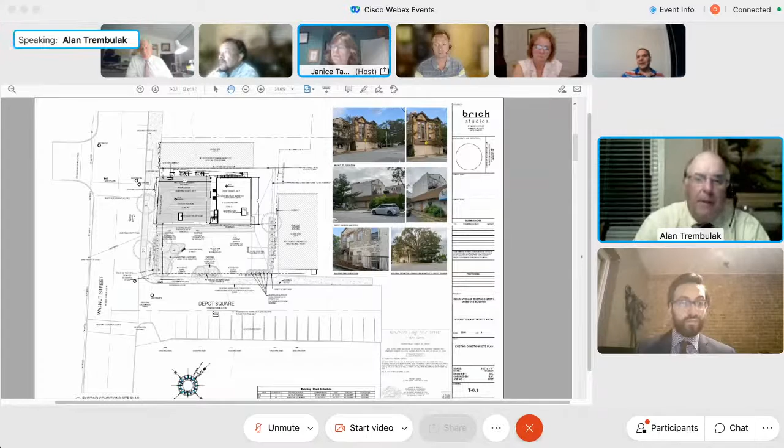I understand. My question to Mr. Orshowski is, originally you showed 4 parking spaces, two sets of tandem parking spaces, but somehow in the design we lost 2 of those parking spaces, so we went from 4 to 2. Well, Janice, that was done specifically. I think when we were before the Development Review Committee, it was pointed out that those 4 spaces really didn't work. Well, right, they were poorly designed, but I didn't think that would result in the loss of 2 spaces. I thought the design could have been approved so you could still have the 4 parking spaces.

Let me back up, Janice, on that one. We did that. The point of that was not to come back with only 2 parking spaces. Another element that impacts that is having a trash pathway. We fit those additional parking spaces on at the expense of having a means of getting the trash from its location to the street.

So in order to satisfy that -- well, couldn't you get the trash pathway along the alley? Is it possible to take the area that you've used to return to lawn to get some more pervious surface in there? Is it possible to use some pervious pavers so that the parking could go further back? My understanding is your engineers do not consider pervious pavers as a pervious surface.

Well, you've got to do something to address the parking issue. And while it may not be a pervious surface, it does allow for water penetration. If you can make the argument to us that it would give us a comparable amount of water absorption -- I would not be qualified to say that. But we would enter -- we don't mind putting pavers there. I would love to, but your engineer shot me down on that: a pervious paver is an impervious surface. Right, but I mean we've...

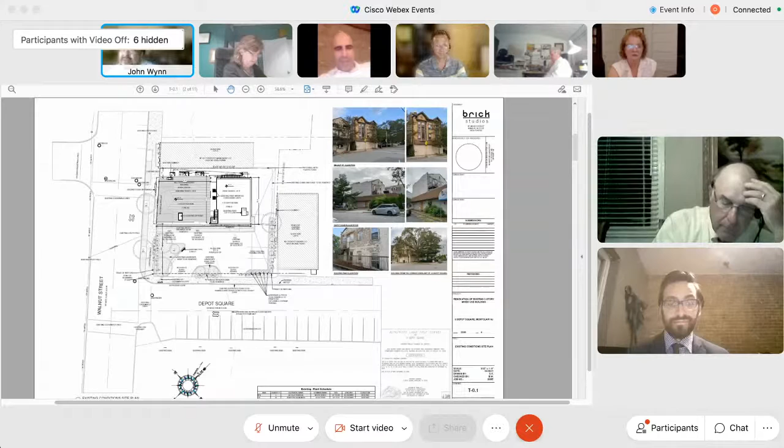I don't even know why you'd want grass back there. It's kind of a pain in the neck to maintain, if you could do something else. It's the requirement in our ordinance to have a variance for it. So they're trying not to have a variance for it, but I mean, I would be willing to consider a variance if you're telling me the practical impact of it is little or none. It makes a difference, plus it gets you more parking. I mean, our ideal situation would be to put pavers the whole drive and behind the building.

If you guys are okay with that, that's our preference, because it's very hard to maintain the grass back there. We were putting grass there to respect the engineer's comments, but we're open to making it all pavers. I believe, from practical use, the pavers do absorb water. I know officially they don't, but they do allow for the water to permeate through them. They've even got pavers that have dirt in them that you can drive along, but it will absorb water, and if need be, there can be retention underneath it, so that it doesn't cause an issue with the runoff. It's a problem that could be engineered around.

And I'll say again, with the garbage back there as well, keep the garbage away from the other apartment building next door. So this would create, instead of a tandem, a triple tandem or a quadruple tandem condition. Oh, we don't know, play with the design, see what you can figure out back there. The idea is it's better for your tenants to be a little inconvenienced with parking in tandem than to have no parking at all and having to hunt for parking on the street, which disrupts, contributes to the disruption of the rest of the town's parking issues. I think our parking and traffic engineer will be able to speak more intelligently on this than I will be able to.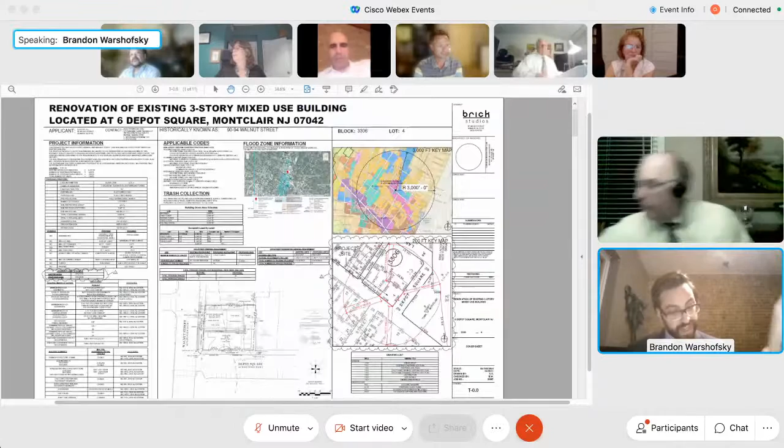Let's see. Plus a series of small plants, one tree in degrading health, a couple of small shrubs in the roundabout, plus those mature screening plants on the plan, right side property line adjacent to the Depot property, and those are indicated to remain.

Help me understand which trees are remaining and how many are not. There's one mature tree that is not remaining, one mature tree in failing health that is not remaining, several small bushes that are not remaining, and several mature screening plants on the opposite side that are remaining.

Well, the only trees that are remaining are the street trees, right? Oh, this tree's coming down. This tree's coming down. These two trees are coming down. Yes, and those are small shrubs or small plantings.

And then there's one in the rear, it looks like, along the proposed parking area. 6 foot tall trees, and one in the rear, which we would be keeping. I don't believe I have that species identified here. You mean this one? Is that the one that kind of slants at a 20-degree angle or so away from 90?

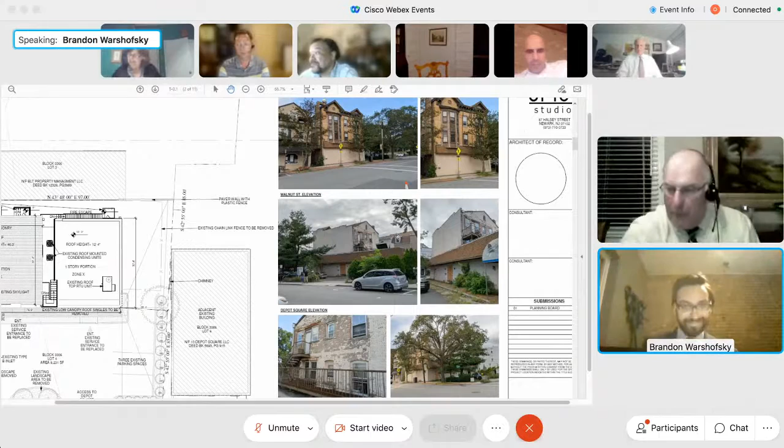But then I'm going to ask if you're going to follow our tree ordinance. You need a permit to remove that? Well, you need a permit, but there's also tree replacement, or I believe donation to the township, so that it can replace a tree in kind for each one you remove.

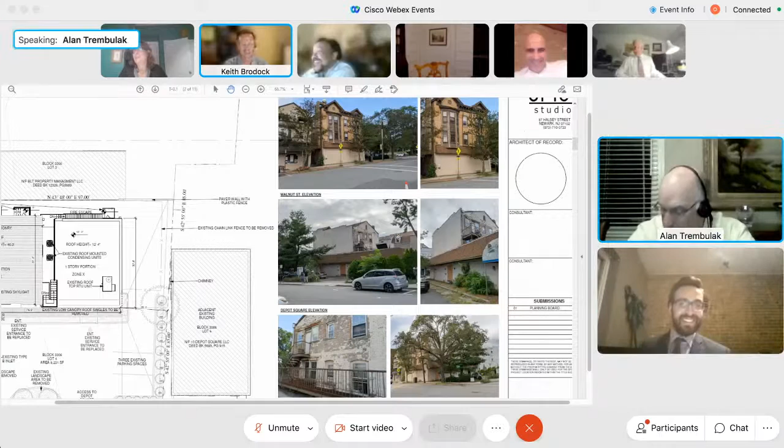Does it need to be a living tree? Well, we don't really want a dead tree. Yeah, I prefer that we plant living trees. Does the existing tree need to be a living tree? I think you should check the ordinance, it seems pretty clear about what needs to be replaced. I think we have to comply with the tree removal ordinance, and we would intend to.

And would you consider using native plants in all of your plantings? We would be very happy to use native plants. I did not have a chance to consult with your town arborist yet, but I do hope to do that. Thank you, I would appreciate that. Absolutely.

More questions from the board? Okay, are there questions from the public concerning the testimony of the architect? Yikes.

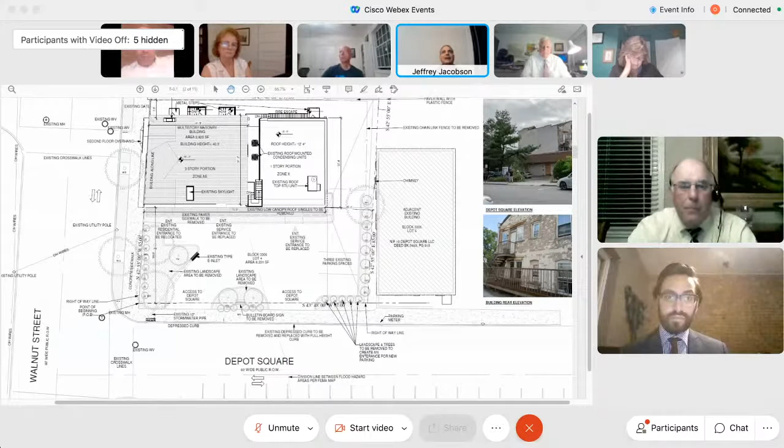I don't think we're looking to tank this because of parking, but I do think that it's going to require a little bit of sensitivity to an issue, period.

So I appreciate the kind words, and just going back to what I pointed out before, the building sits on a corner. It's a two-sided building, and I was really against putting 30 feet of a parking lot. We're very sensitive to the facade, because your depot is now your new facade. If we add 2 more spots, you're literally taking 30% of that facade for parking.

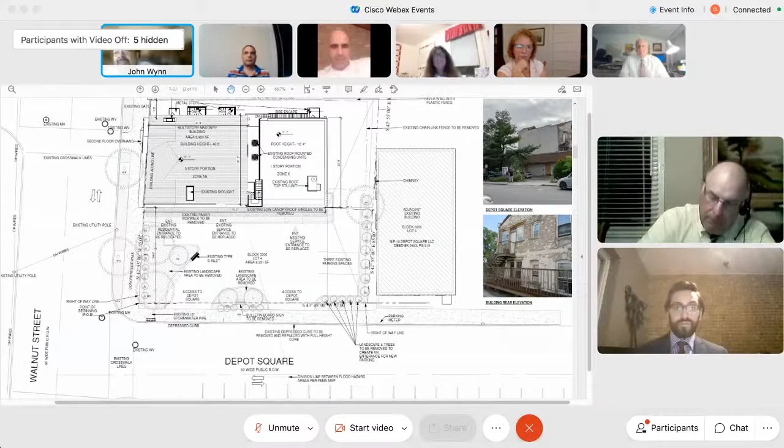Definitely. We look forward to continuing this at the next meeting, and for you to come back and think outside the box a little bit. Asking for another variance, if there's a really good reason for it, is better than putting in something that's not quite up to par without any variance. We'd rather give you a variance for something that works better than approve something without a variance that doesn't work.

So Janice, what's our scheduling like for this? I'd like to carry this to the October 18th meeting, because we're going to have to cancel the October 4th meeting. So we'll carry this to the October 18th meeting.

I assume no further notice would be required. Nope. And if we need extensions, you will grant them to us, right? We consent to any extensions required for the board's time to act. Excellent. All right, then we look forward to seeing you back next month.

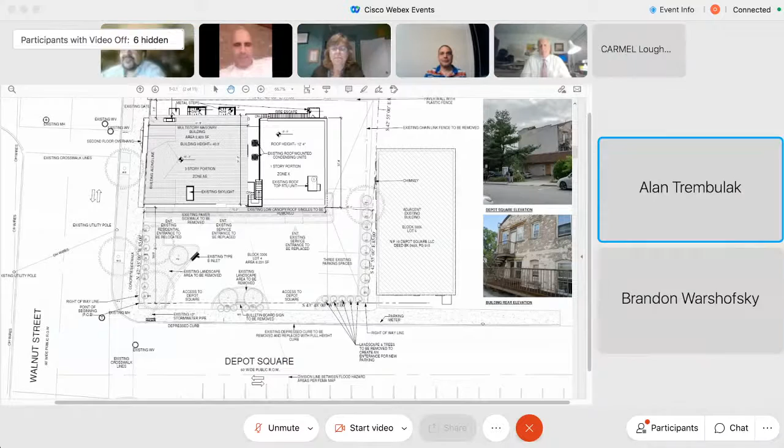So Janice, how are we situated with the other application? Well, Mr. Berkowitz is here. I just made everybody a panelist by mistake. I've done that before. Mr. Berkowitz, and I see that we have Mr. Dawson as well.

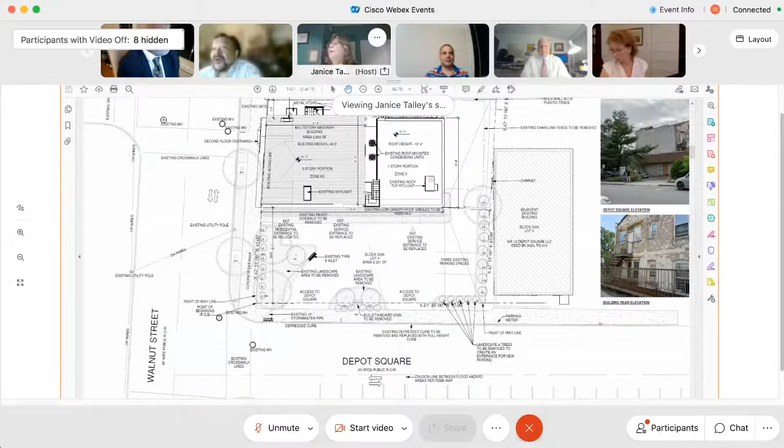Counselor, how many witnesses are you having for your application? Because we have a policy of not starting new witnesses after 10:30. We have one witness, it's Mr. Dawson. All right, so here's what I propose: a 5-minute recess to refresh our drinks and answer nature's call, then 5 strict minutes, and we'll come back and see if we can hear your application and give you a decision.

Very good, I appreciate it. Thank you very much. All right, 5 minutes, everyone.

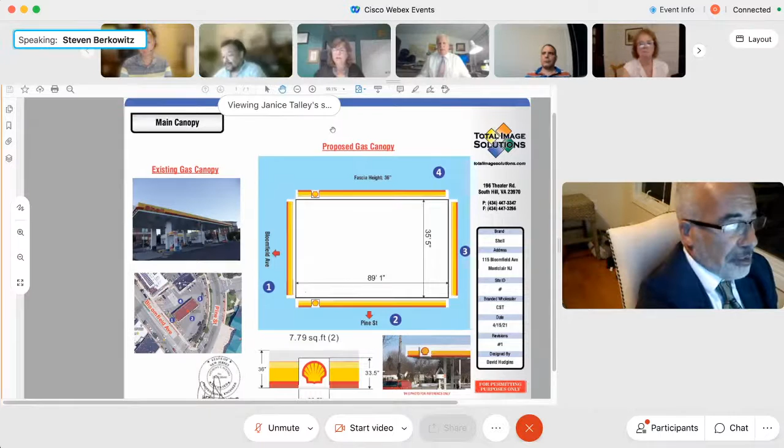Likewise, ready. Okay. All right, Janice, let us know when everything is up and recording. Yep, we are recording. All right. Is Mr. Dawson able to be heard on the video? Mr. Berkowitz, we can hardly hear you. Can you hear me better now? Yes. Okay, I will project my voice into my screen because apparently that's where the microphone is.

I want to thank the board for entertaining our application. This is the application of Total Image Solutions. Excuse me, you're kind of fading on us, sir. You can't hear me now? We heard you at first, but as you settled back into your chair, you faded away. All right, I'm going to stay up on the edge of my chair.

Okay, my only question is a technical one: is Mr. Dawson able to be heard? Mr. Dawson, I made you an attendee—I mean, a panelist. Yes, ma'am, can you guys hear me now? We can, yes we can. All right, thank you. Okay, good.

So we're going to be presenting one witness for this application. We've submitted our application, Ms. Talley's got...

Mr. Berkowitz, I'm very, very sorry, can you face your computer? It looks as if you're looking elsewhere. You know what the problem is? My image is on a different screen. How's this, is this better? If you can get a little closer to the microphone on your computer, that would go a long way. Okay, can you hear me now? Yes, a lot better. Okay.

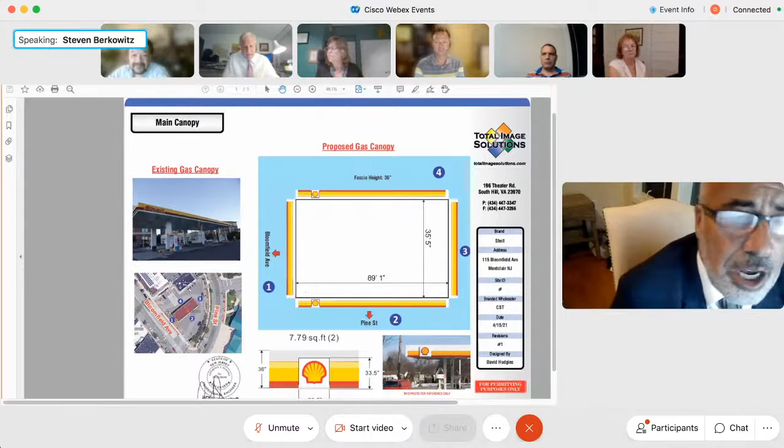I'm going to cut right to the chase. Mr. Dawson, may I present my witness? Mr. Neiss, may I present my witness? Yes, we'll need to get him sworn in.

Mr. Dawson, do you have video? For whatever reason, my phone's not picking it up right now. I tried and it kicked me off, so I'm sorry, panel. This presents a little bit of a problem. I can try it again, it may just kick me out, but I'll try if you guys would be patient. Sometimes if there's not enough bandwidth, the video won't work. All right, give me one second, I'll try to open it back up, and if something happens I'll just log right back in. Okay, all right, one second, guys.

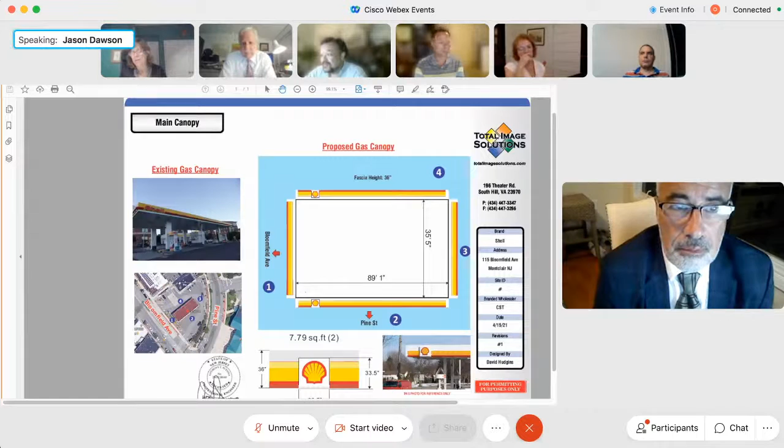You guys have me now? Oh, there you are, there he is. All right, we hear you and see you. Good, you're good. All right, you're a lot better looking than your voice sounds. Okay, it's late, he just got done with football practice.

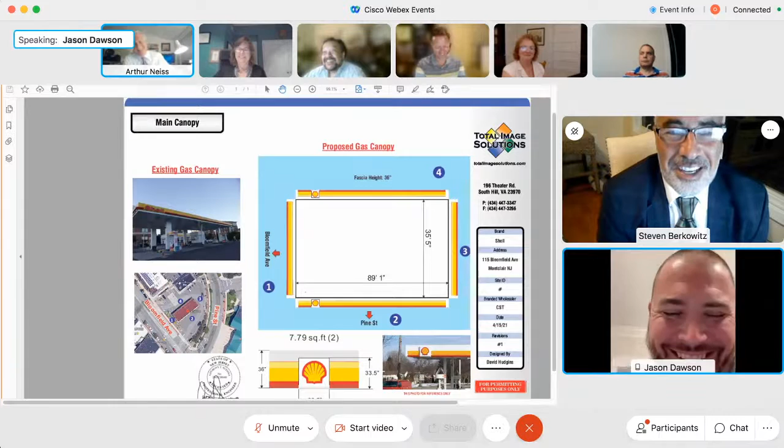Let me just get a couple of preliminary questions. Mr. Berkowitz, where is your office located? We're located in Marlton, New Jersey.

Mr. Dawson, would you mind raising your right hand, please, sir? Do you solemnly swear the testimony you're about to give will be the truth, the whole truth, and nothing but the truth? Yes, sir, I do. Would you please state your full name and business affiliation for the record? Jason Lee Dawson, owner of Total Image Solutions.

Okay, thank you, Mr. Neiss. Mr. Dawson, could you tell the board what Total Image Solutions does? Total Image Solutions is a company started 10 years ago who handles re-imaging of petroleum gas stations across the country.

Okay, could you tell the board what this application is for? This application is for a Shell retail image, visual image evolution upgrade of the local gas station. In plainness, it's just really upgrading the fascia of the canopy. As you noticed in the past, the shell letters were illuminated on the canopy. The new image is the pecten that's mounted on the canopy, which is the shell logo that's known globally. That's really the main change we're looking to make here, and I think the reason we're here for the meeting tonight.

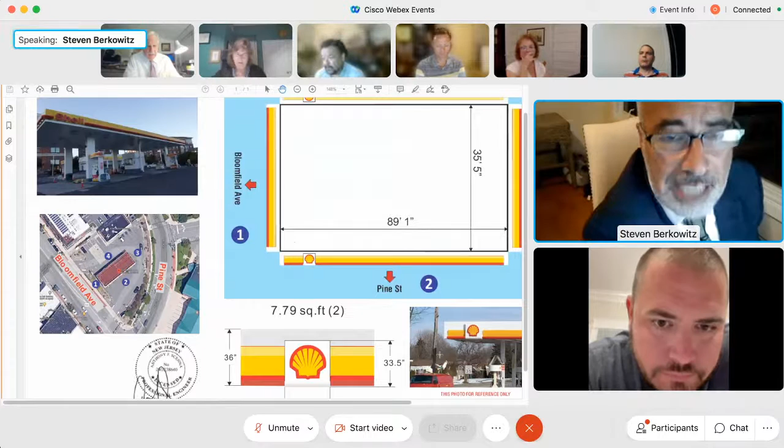Have you been involved in the applications that have been approved in the past? Yes, sir. And is this a great variance from what has been approved in the past? No, sir. This is just a standard change in their image, which happens for most major oil brands. I think here it's just going with their global image versus the logo of the past.

Is the actual square foot of the sign, how does it compare to the previous sign? From what I've checked into, it's smaller than what's there previously. It looks like what we're looking at is the orientation is different. So instead of a rectangle, the shell letters being longer and a little bit shorter, we're looking at more of a square. That's really where we're at - smaller square footage, but in a different orientation.

How does Total Image Solutions propose to handle the demolition waste of the existing sign? Dispose of it according to all applicable laws. I think right now it's probably neon or a fluorescent tube. We would remove that, dispose of it off-site with an appropriate EPA disposal agency, and install the new one as per local code.

I will open the witness up to questions from the board at this time. If I could just interject, I just want to note the reason we're here is because this sign requires a variance. And the variance that it requires is that the new logo is higher than the height of the canopy. So it's going to extend above the top of the canopy, and our ordinance does not permit that. Otherwise, you're right, it's smaller in the square foot area than the existing sign.